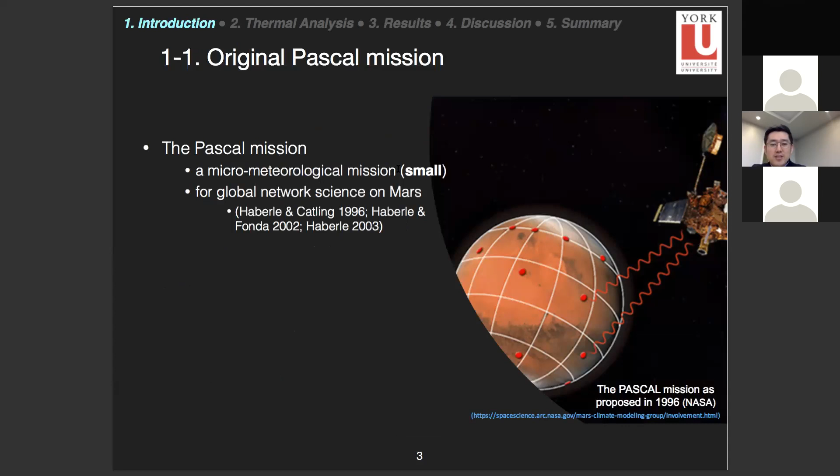So the original Pascal mission was actually proposed over 20 years ago. And they tried to send to Mars several micro-meteorological landers, which were actually small at the time. And the main objective of the mission was to validate Mars General Circulation Models, GCMs, by measuring global surface pressure.

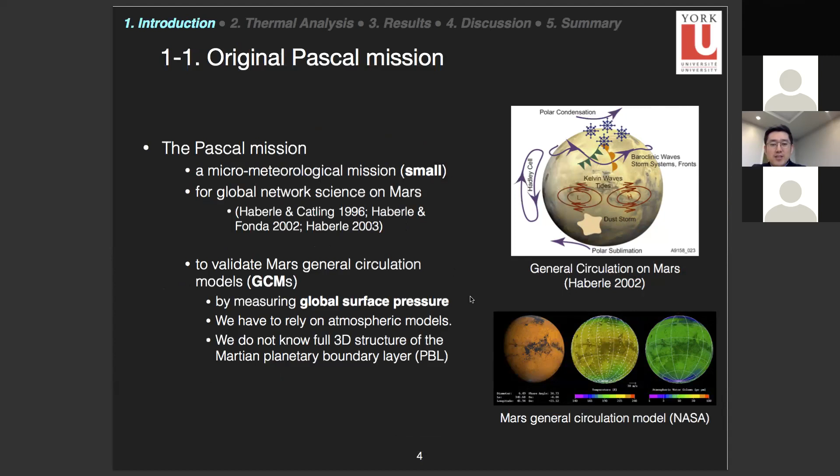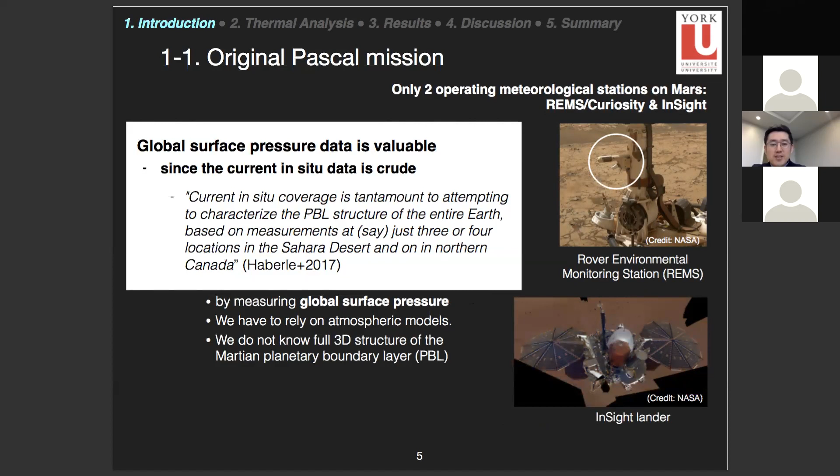The importance of the measurement of the global surface pressure is that our current knowledge from in situ data is very crude. It's like attempting to characterize the PBL, which is the planetary boundary layer structure of the entire Earth, based on measurements at just 3 or 4 locations in the Sahara Desert and in northern Canada. So currently there are only 2 operating meteorological stations on Mars. Those are REMS on Curiosity, and the recently landed InSight lander.

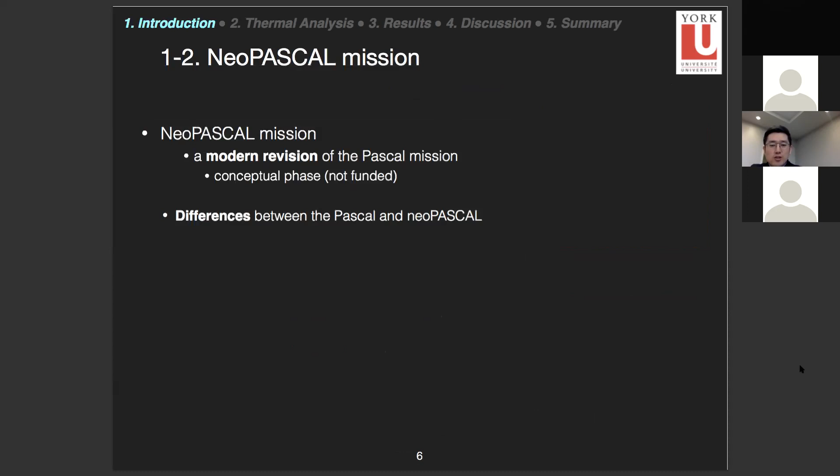So the Neo-Pascal mission is a modern revision of the Pascal mission. Currently, it is a conceptual design. We don't have funding yet, so hopefully we'll apply for funding in the future. The major difference between the 2 missions is size and mass. Thanks to recent progress in miniaturization of technologies, we can use CubeSat and commercial off-the-shelf (COTS) components, so that we can reduce the mass about 10 times from the previous mission.

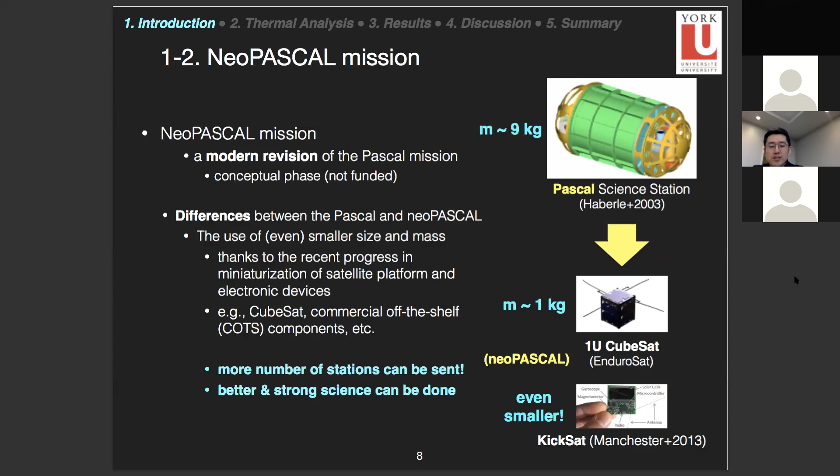By doing so, we'll be able to send a larger number of stations, and as a result, we will be able to do better and stronger science in the future. However, there are several challenges, like thermal, structural, electrical and EDL, which is entry, descent, and landing. In this study, I will focus on thermal design, and everything other than that will be covered in further studies. So, the purpose of this study is to assess the feasibility of the thermal design and thermal model of the Neo-Pascal mission through thermal analysis.

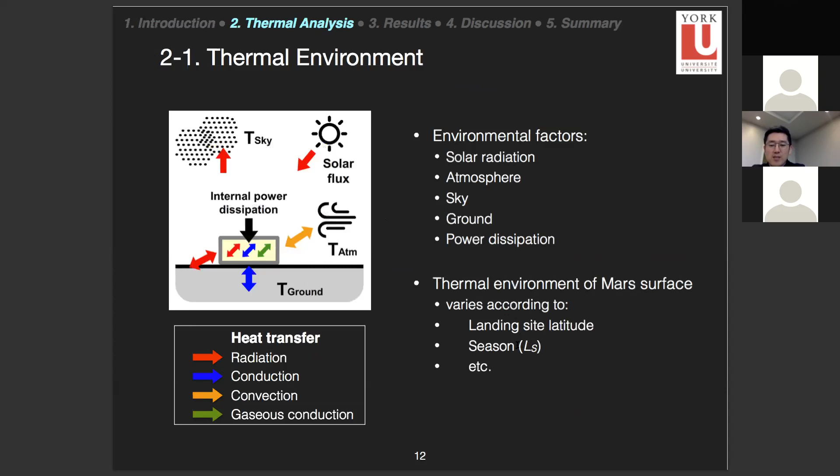The second section is about thermal analysis. First of all, I want to talk about the thermal environment of Mars. The landing station will exchange heat with environmental factors, for example, the sun and atmosphere, and cold sky and ground as well. And the values of the thermal environment, like temperatures and solar flux, vary mainly according to landing site latitude and seasons, which can be defined by Ls, which is solar longitude.

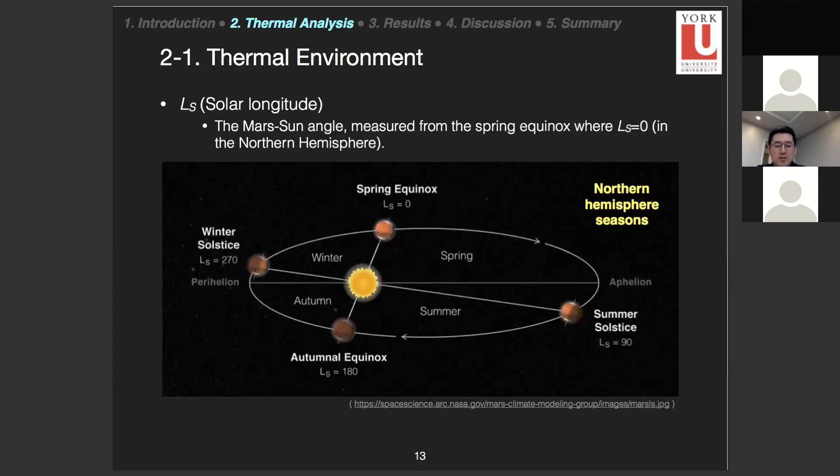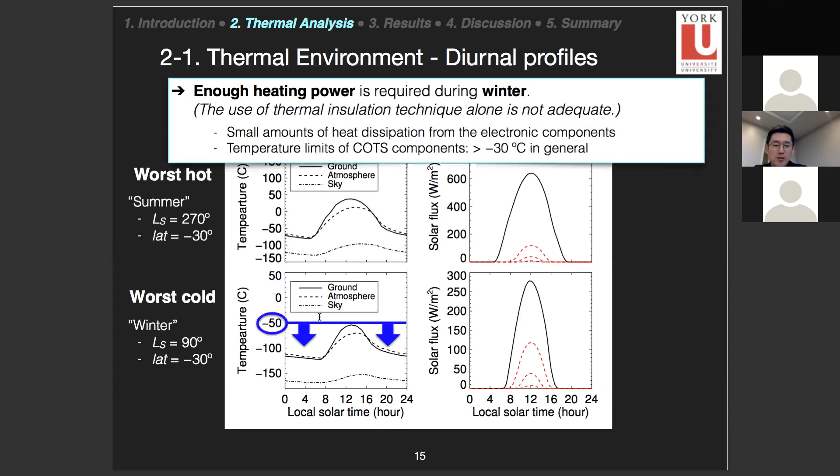And as you can see in the left panels, for the worst hot case in summer, the temperature of the environment sometimes goes above room temperature. However, in the winter, most of the temperature goes below minus 50 degrees Celsius. So this indicates that we need enough heating power for a successful mission. And in order to obtain enough heating power, we should get more solar flux.

That is natural. However, as you can see in the right bottom panel, those values indicate solar flux at the surface according to latitude. So when it is minus 30 degrees, the peak goes over 270 watts per square meter. However, when the latitude goes down to minus 50 or 60, it greatly decreases. So in this study, at first we wanted to assume the landing site latitude to be plus minus 30 degrees.

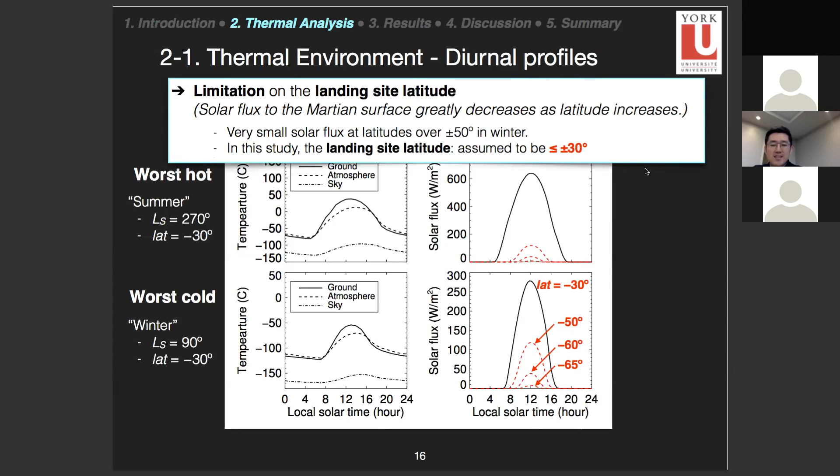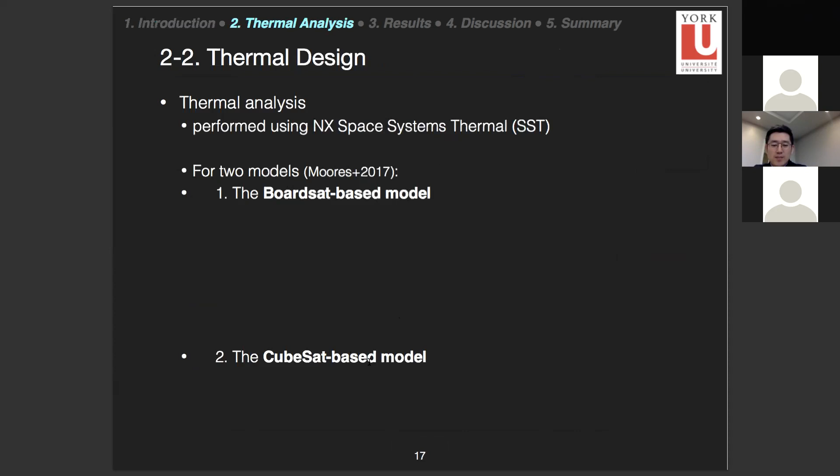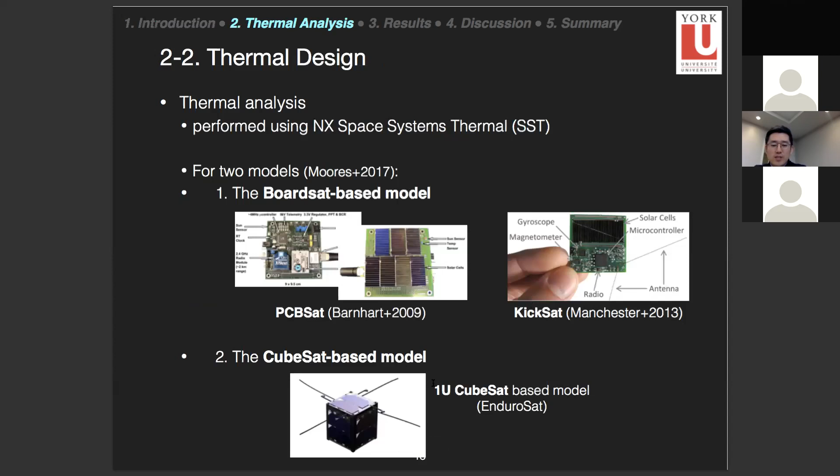And we performed thermal analysis for two models. The first one is a Boardsat-based model, and the second is a CubeSat-based model. And those platforms have been recently used by other researchers, and the CubeSat platform is widely used at the moment.

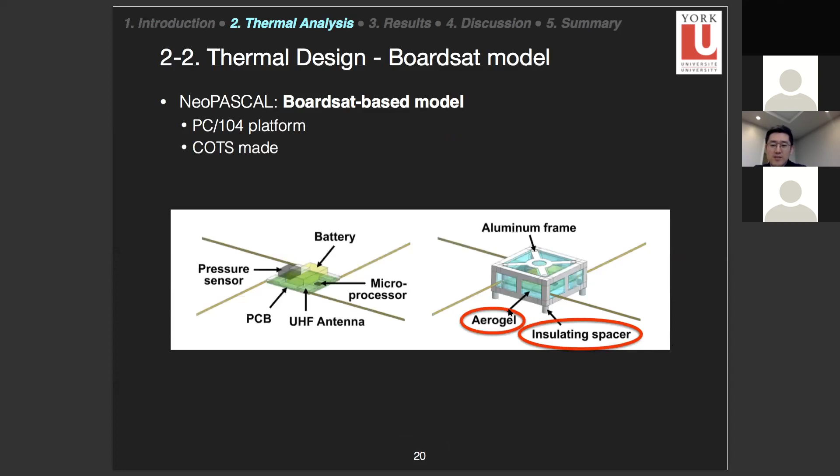And in the right panel, you can see some thermal structures, something like aerogel and insulating spacers. For aerogel, we want to use a flexible one in order to avoid any damage or crack, because the launching and landing environment will be very harsh. And the aerogel's thermal conductivity is very low.

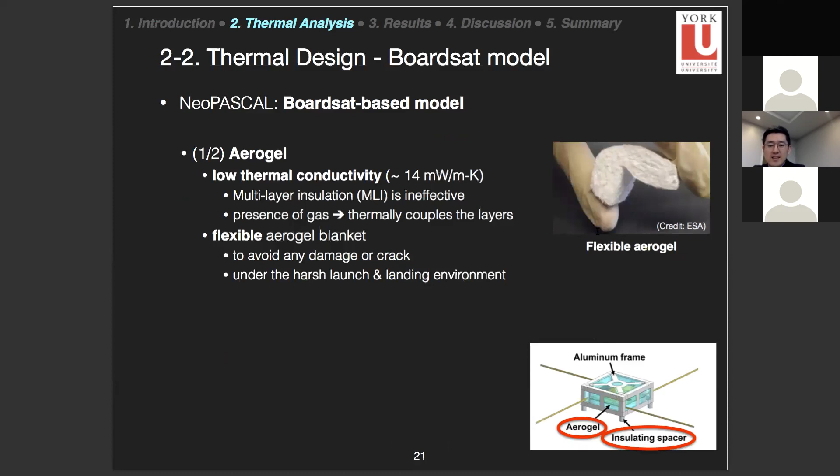We also use the insulating spacers. Actually, the spacer is made of aluminum, which has quite moderate and high thermal conductivity. But by inserting G10 washers, which have low thermal conductivity, we can greatly decrease the effective thermal conductivity. And those insulating spacers will be mounted to the corners and its structures.

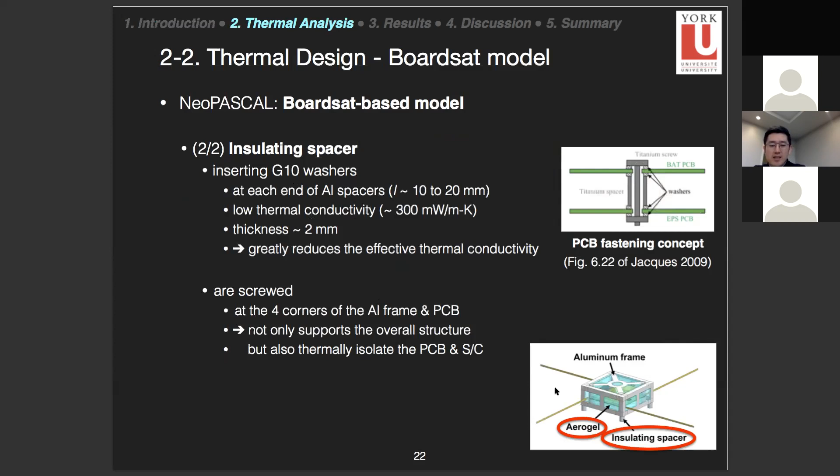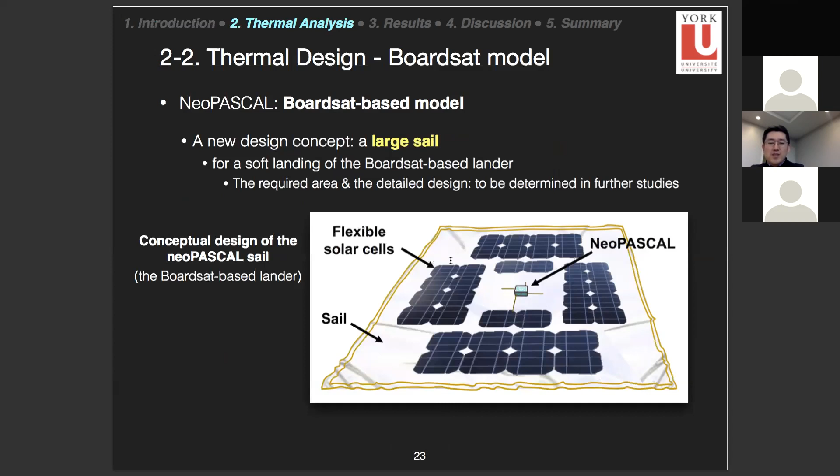And I want to show a new design concept, which is a large sail. Basically, this sail is for soft landing of the Boardsat-based lander. As you can see here is the Boardsat-based lander. And the great advantage of this kind of concept is that we can utilize a large area for the flexible solar cells. So we want to use commercial flexible solar cells to maximize the power generation.

And those kinds of concepts were already demonstrated by other researchers. Something like Tsuda and colleagues demonstrated a deep space solar sail, and they attached thin film solar cells on the sail and something like that. But we have a different purpose. Our sail is mainly for landing. But the detailed structure and design of the EDL is not covered in this study.

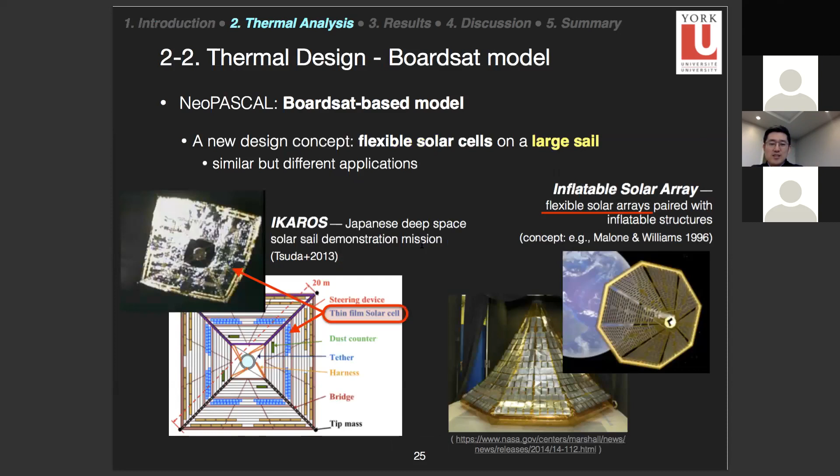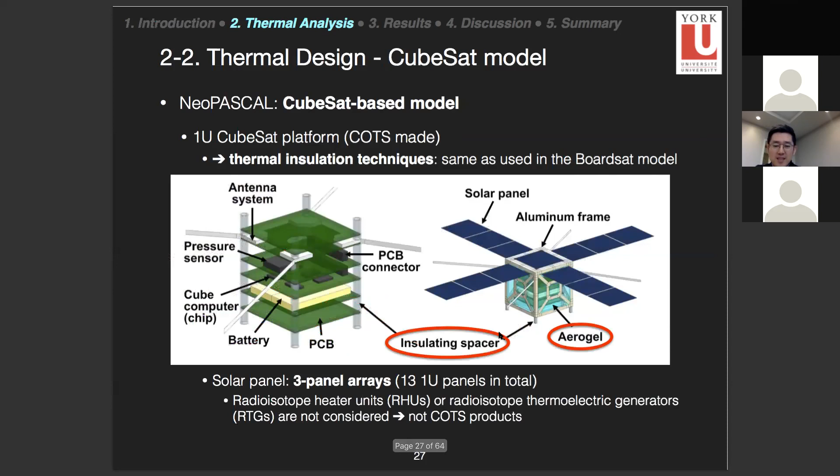So the second model shows the CubeSat-based model and the components here. And we also use aerogel and insulating spacers as well. And this table shows the power budget of the Boardsat-based model. And we calculated assuming 10% margin from the power consumption.

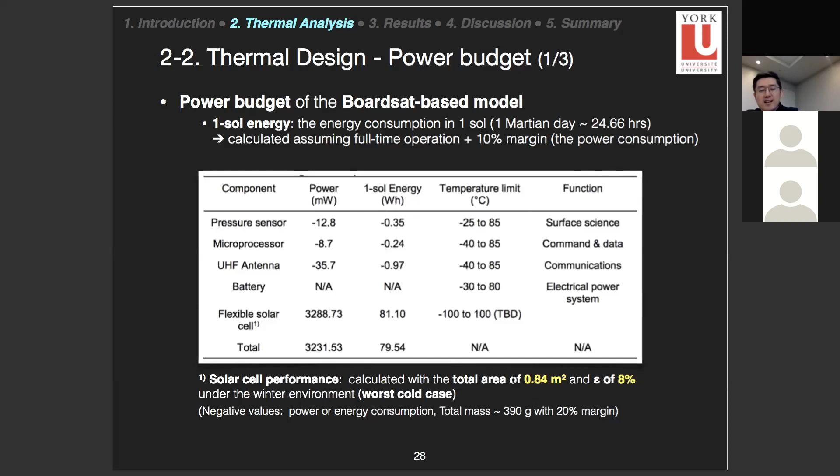And as you can see here, negative means the consumption. So power consumption of each component and one sol energy. One sol means one Martian solar day. One sol energy is calculated like this. And the solar cell performance values were calculated using a total area of 0.84 square meters of solar cells and an efficiency of 8%.

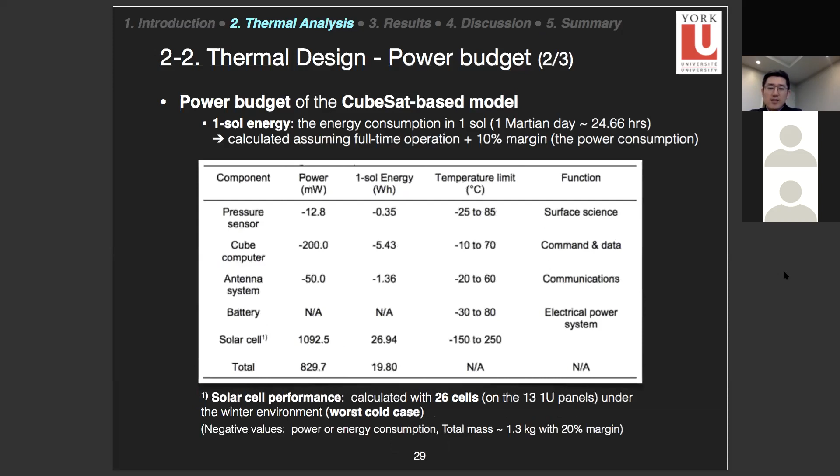So this value, 1724 watt hours per square meter, is calculated as the area under the solar flux of the solid line. And the dust deposition of 30% was calculated using a dust deposition rate of about 0.3% per sol.

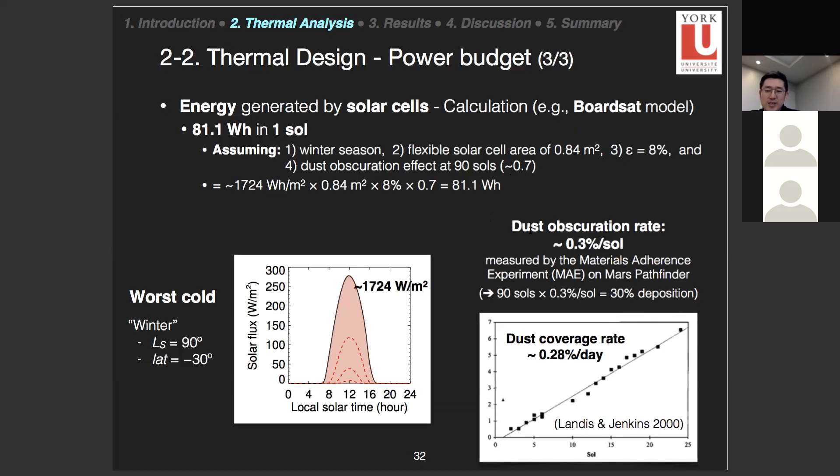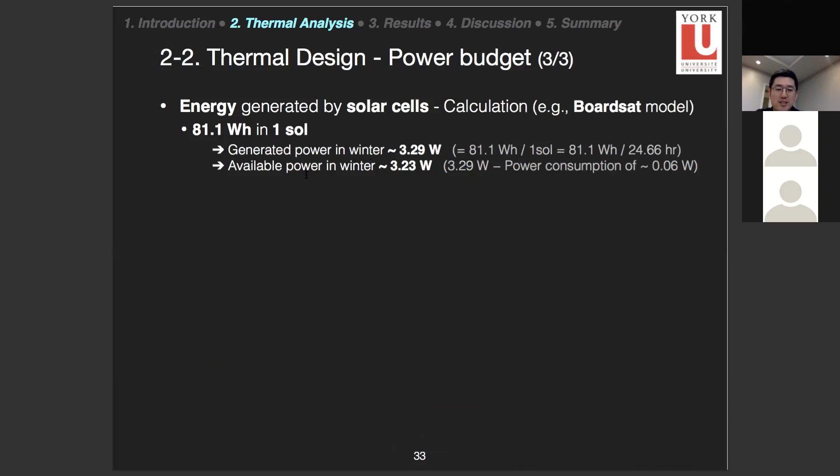And using the previous values, we also calculated the generated power in winter and available power in winter. Those values were also calculated by assuming 20% of margin from the heating power here, and 20%. And we also assume that there should always be a remaining battery power level of about 20% every morning, just in case and for emergency. So we use several margins just in case.

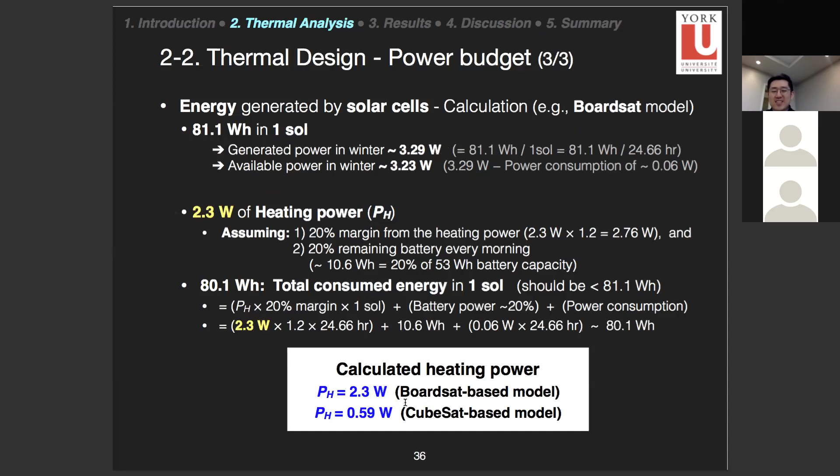So the finally calculated heating power of the Boardsat-based model is 2.3 watts, and that of the CubeSat-based model is about 0.6 watts. The reason why the heating power of the Boardsat-based model is larger than the CubeSat-based model is the use of the large area of the solar cell.

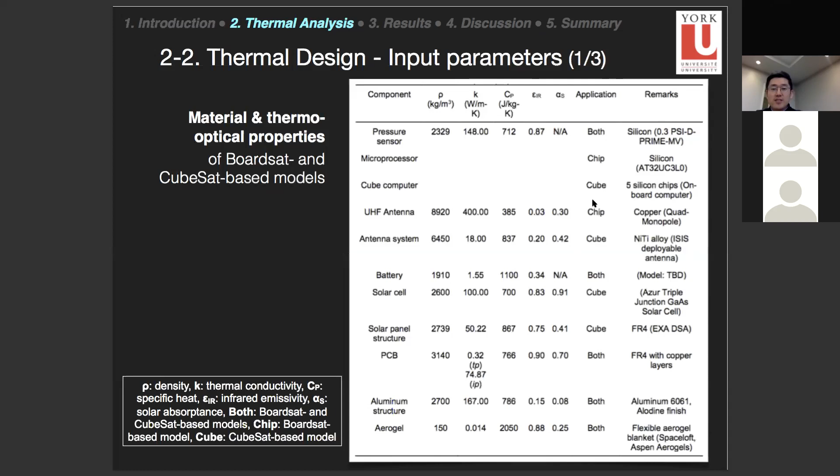And this table shows the input parameters, something like density and thermal conductivity and thermo-optical properties of each component according to their materials. And we also calculated thermal conductance values between two joint surfaces. And I want to skip this part.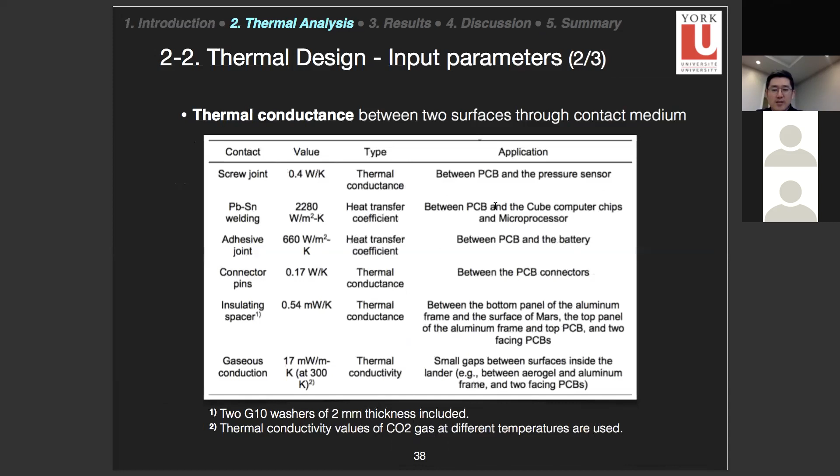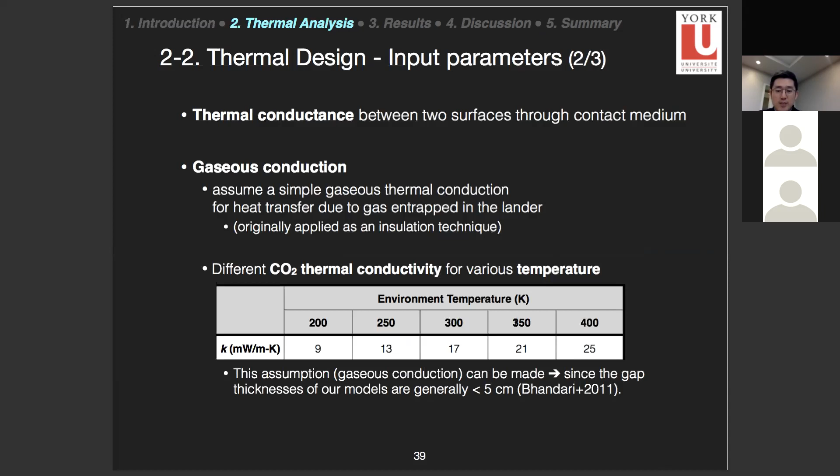And I also calculated gaseous conduction between PCBs and some components, because there are thin gaps between the layers and the PCBs. And so I used the CO2 thermal conductivity for various temperatures, as you can see in the table. I also used extreme convective heat transfer coefficients based on the literature, and also albedo here as well.

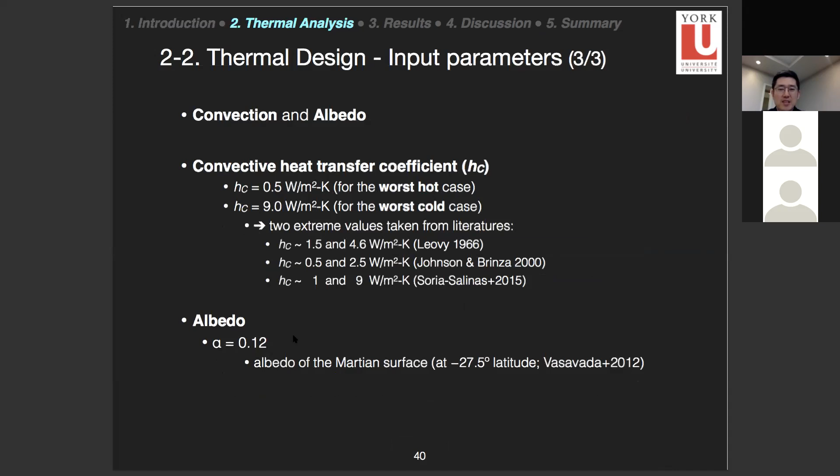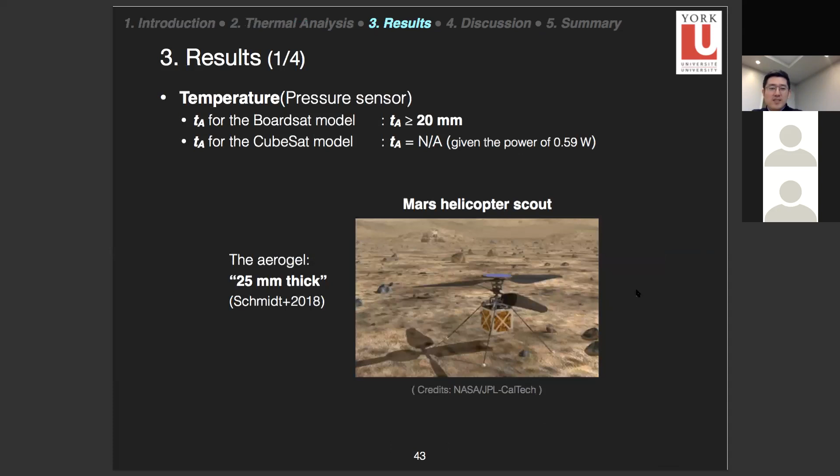This indicates that we absolutely need enough heating power in order to survive on the Martian surface. So our analyzed aerogel thickness is slightly thinner than the aerogel which will be used in the Mars Helicopter Scout, which will be deployed from the Mars 2020 rover. The second result shows the temperature of each component.

I used a single aerogel thickness. As you can see in the right panel, the CubeSat-based model with 15 millimeter thickness of aerogel does not satisfy the requirement, especially in winter.

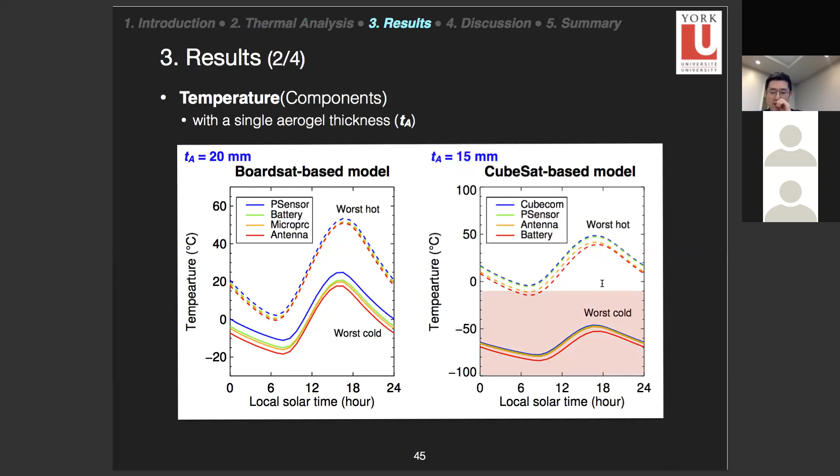However, with the Boardsat-based model, every component satisfies the temperature requirement, and each temperature is about 15 degrees Celsius above the requirement. So I think our thermal model is quite robust.

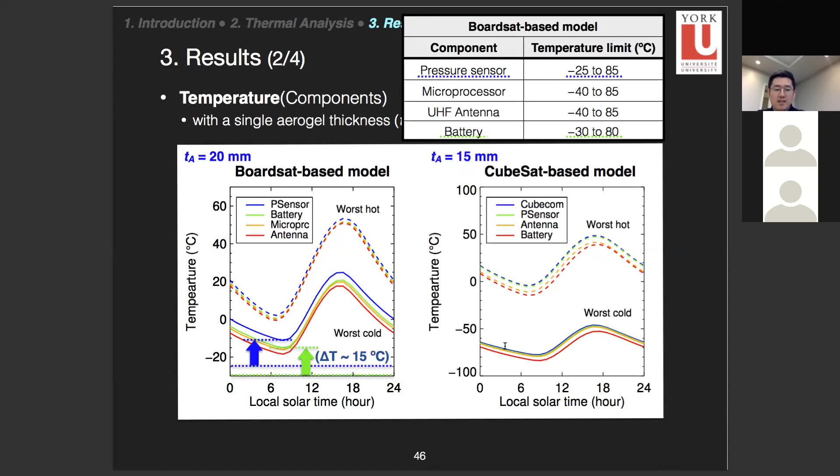These figures show the temperature distribution at the coldest moment, which is nighttime in winter, the worst case. The outer structure of both models has very low temperature. However, in the left bottom panel...

the inner component's temperature of the Boardsat-based model has quite a good temperature range within the temperature limit, even though the result of the CubeSat-based model does not satisfy the requirement.

However, we can see the effect of the use of insulating spacers here, because the temperature of each PCB is discreted.

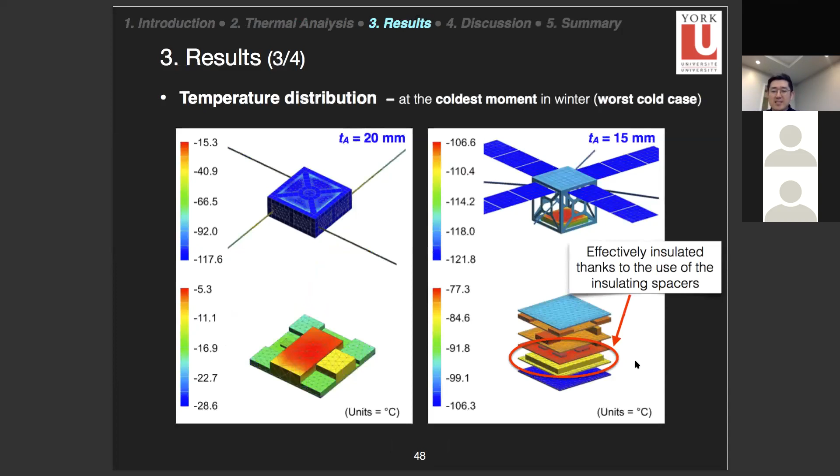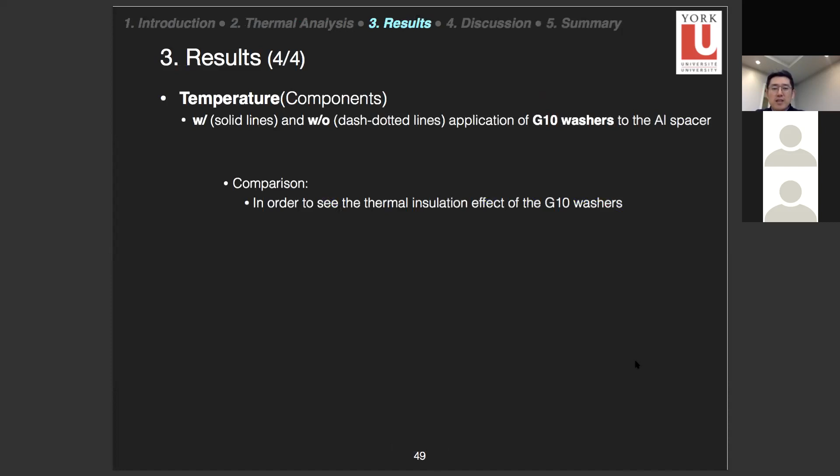Okay, so discussion. What specific science with the NeoPascal mission can we have? It depends on the landing site latitude, basically. In our study, we limited the landing site latitude between plus minus 30 degrees.

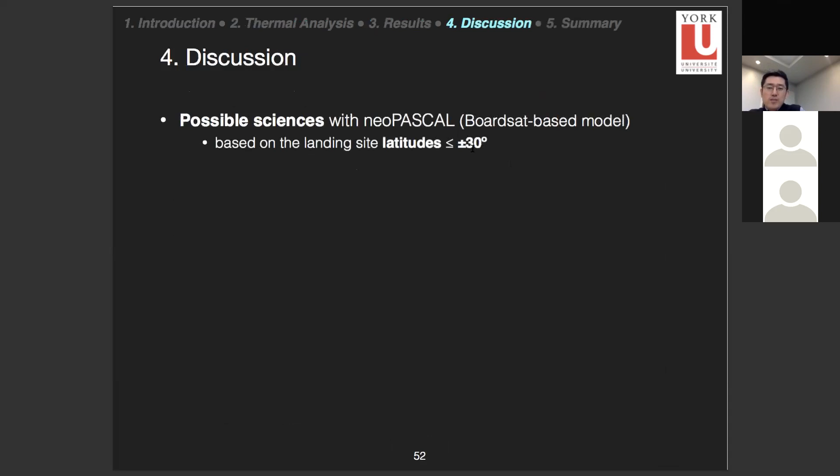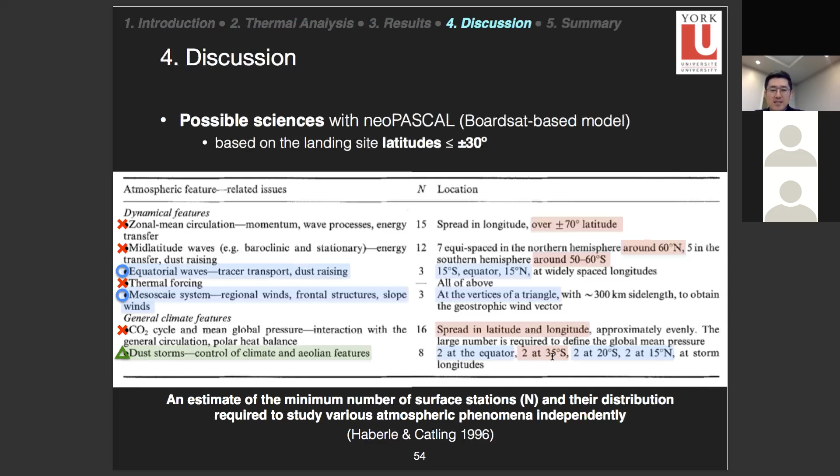I want to talk about the feasibility of our thermal model. The thermal model of our study is quite feasible, and based on the thermal analysis results, it will survive in any season for at least 90 sols, only if it is landed between plus minus 30 degree latitudes.

The reason I said our thermal model is quite robust is that we assumed several margins, and some of those margins are quite tight. For example, we used a solar cell efficiency of about 8% for the Boardsat-based model. However, there are several brand new flexible commercial solar cells which have over 14% efficiency.

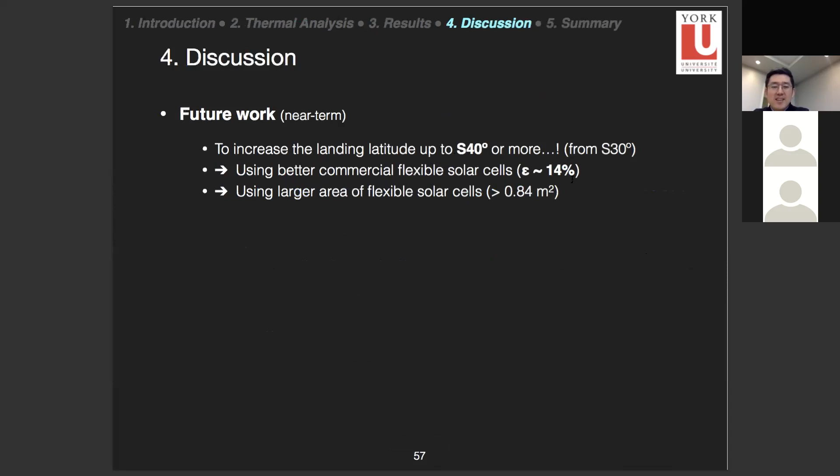So for future work, I want to increase the landing latitude up to 40 degrees or even more, like 50, by using better commercial flexible solar cells with higher efficiency, and by using a larger area of flexible solar cells.

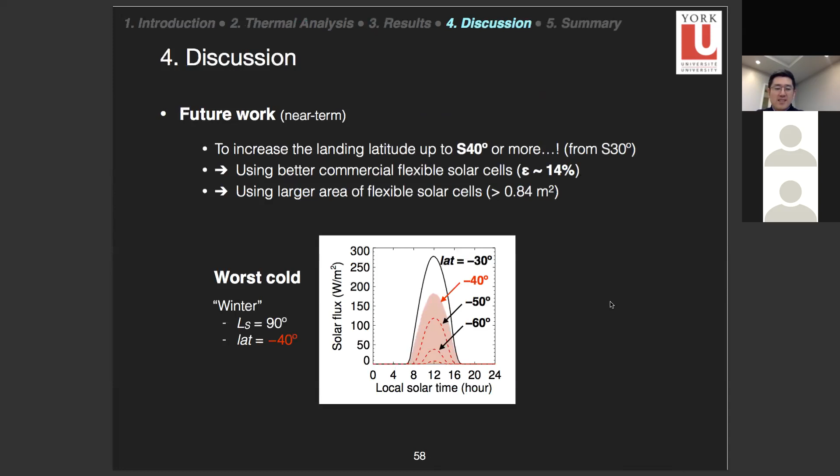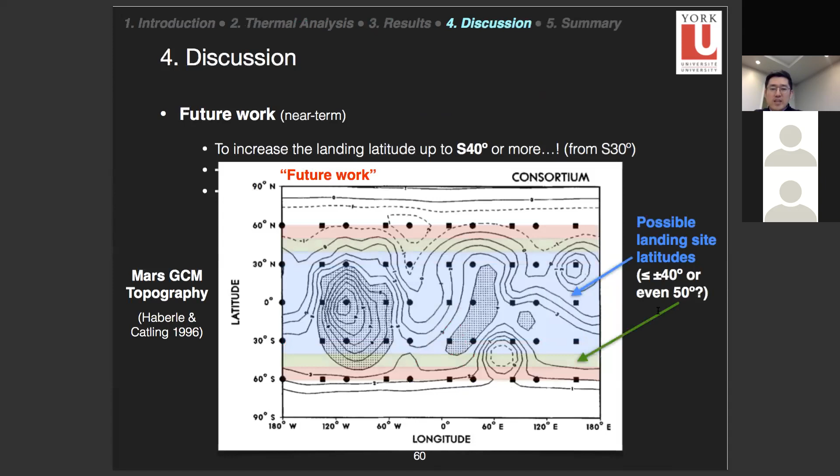So by doing so, the sciences that we can do with the NeoPascal mission will be more, including the dust storms and maybe mid-latitude waves as well.

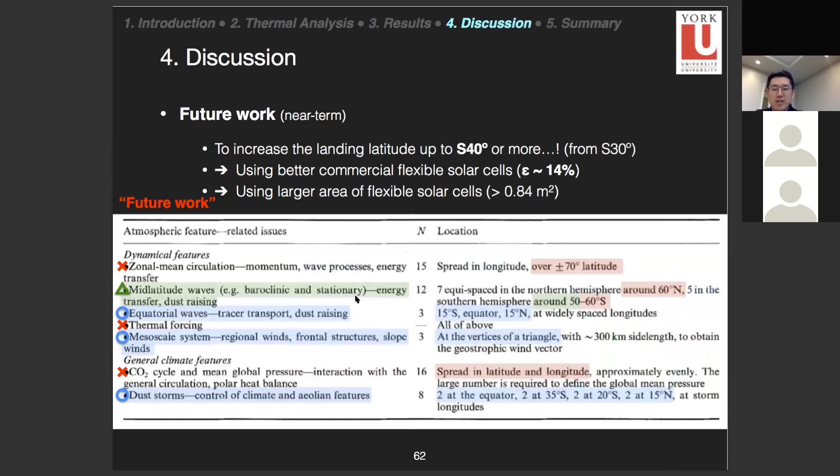And for Mars meteorology, the NeoPascal lander will be able to study these topics. Okay, thank you.

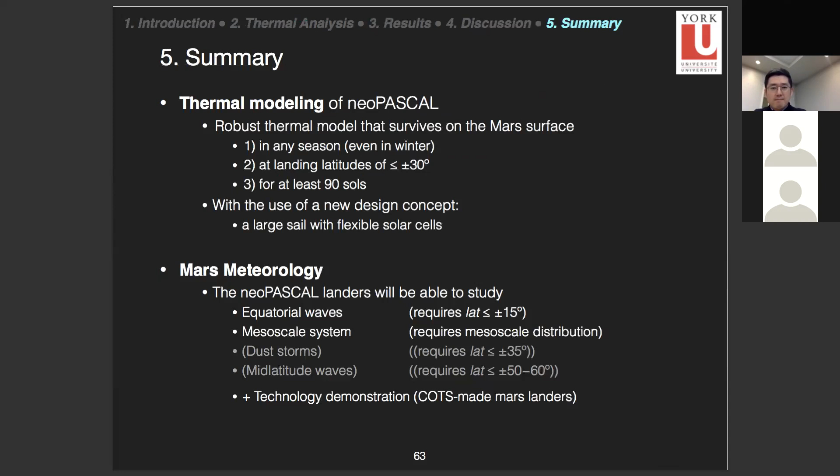Are you in the same room actually? No, I'm not in the room with them. Okay. All right.

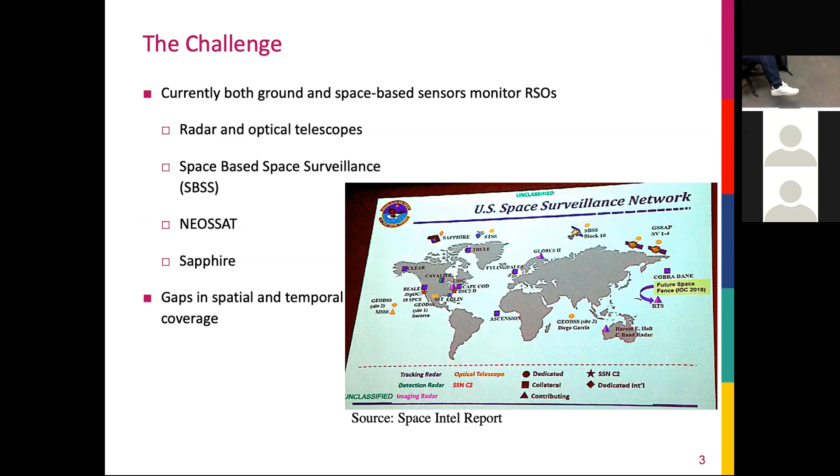You can see in the image there, SBSS, space-based space surveillance, and the GSSAP satellites, which I believe are for observing the geostationary belt. Canada also has two of its own satellites which monitor RSOs: Sapphire, which contributes to the Space Surveillance Network, and NEOSSAT, which I don't think contributes to the network database, but it still searches for RSOs. But despite all of these efforts, there's still gaps in both the spatial and temporal coverage that we have of RSOs.

One idea is to use star trackers to monitor RSOs. Star trackers are used for attitude determination. Essentially, you take an image of the stars and you can tell which way your satellite is pointed, and these are used on a lot of satellites right now. So the thought is that they may provide an additional source for RSO detection.

It's not intended to replace anything. It's not going to replace radar or optical telescopes on the ground, but it's meant to complement them and provide an additional source of RSO detection and updates.

That's what Magellan Aerospace is doing, co-funded by the CSA's STDP program. They're designing analytic and machine learning algorithms that will detect RSOs within star tracker images. And that is where I come in.

My objective was to perform a feasibility study of commercial off-the-shelf star trackers and their ability to detect and identify RSOs.

Some of my goals were to determine the number of RSOs that would actually be detectable by a star tracker in orbit around Earth, how many objects you're actually going to see. I also modeled some of the effects that different star tracker and mission parameters have on detection rates, mainly the orientation of the star tracker - how does the direction you're pointed affect the number of objects that you see?

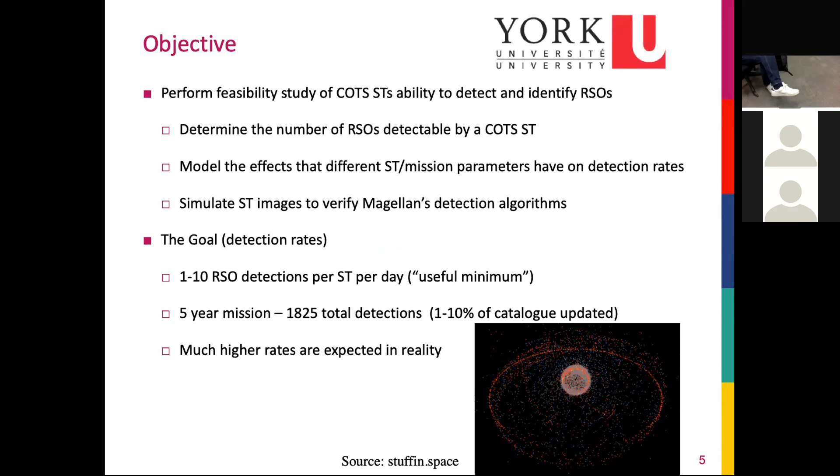The way I did these things was through a couple different simulators. One was an analytic simulator, and it estimated detection rates - given this star tracker and these characteristics, in this orbit looking in this direction, how many objects are you actually going to see? How many resident space objects?

The simulator uses the TLEs, the two-line element sets, of RSOs and the host star tracker satellite. These two-line element sets contain all of the information needed to recreate the orbit of a satellite. Using this information, it propagates the orbits of the RSOs over a specified amount of time, and determines how many objects the star tracker will actually see.

It spits out 4 parameters at the end: 2 accesses and 2 detections. An access is any time an RSO crosses the field of view of the star tracker, and a detection is when the RSO is close enough, big enough, and bright enough to actually be detected. The terms unique and total refer to: unique is the number of unique individual objects you detect, and total takes into account repeat detections of the same object.

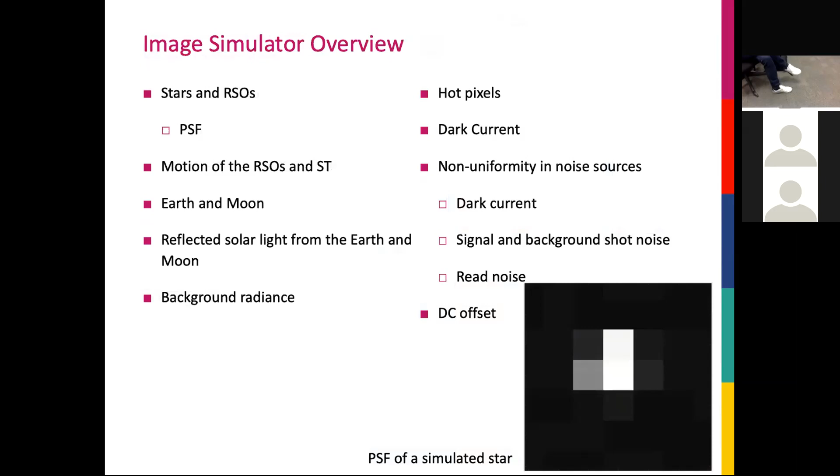It simulates the Earth and the Moon, as well as reflected solar light from the Earth and the Moon, which causes background noise and makes it difficult to detect RSOs. Background radiance, and then a bunch of noise sources as well, so hot pixels and dark current, non-uniformity in these noise sources, as well as a DC offset, just intended to make the images as close to level 0 as I could.

These are 2 simulated images just showing the different exposure times. So there's a lot of information in the headers up there. But on the second line, on the image on the left, the exposure time is 0.1 seconds. And on the image on the right, the exposure time is 10 seconds. And this is just showing when you have a longer exposure time, the stars begin to streak and you have more noise.

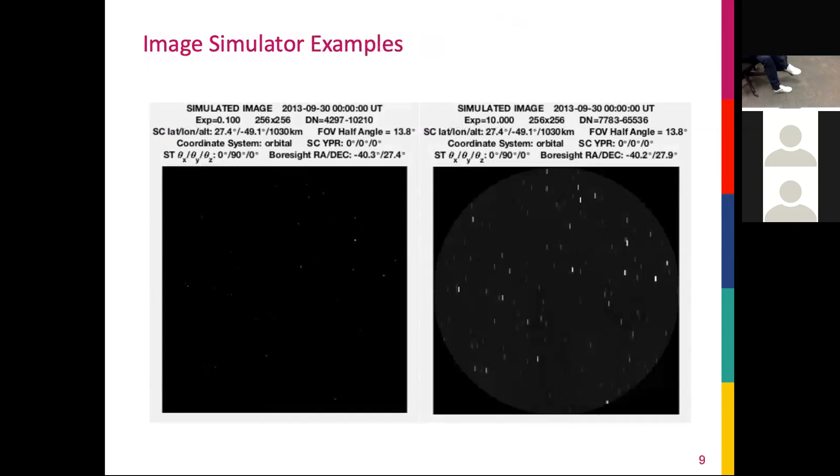So here, zooming in on them, you can just see all the stars are streaking in one direction, and then RSOs are typically going in other directions. So those are two RSOs there.

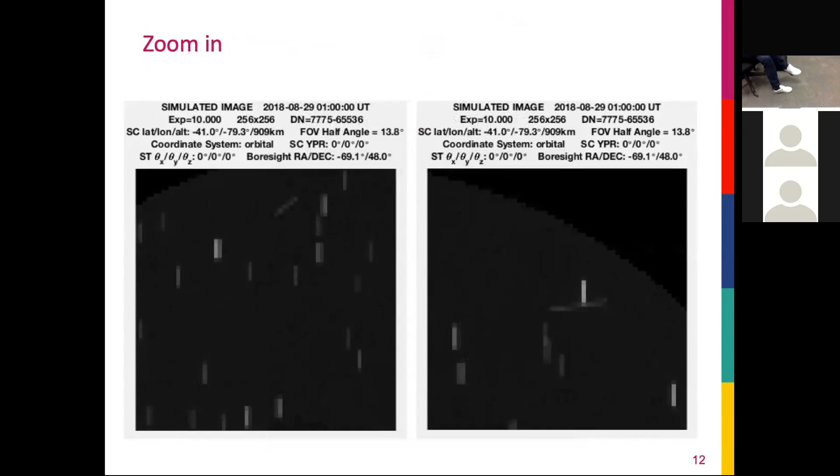Comparing with the FAI, I was able to compare the position of the RSO as well as the brightness to verify and quantify that the image simulator is actually working properly and doing what it's supposed to do. I also compared with this final image here. Same thing, this is a rocket body: FAI image on the left, the simulated image on the right, at the same time, same parameters.

One thing to note, all the RSOs are simulated as spheres. The rocket body was simulated as a 16-meter diameter sphere, just to simplify some of the calculations the simulator needs to go through. So this rocket body was simulated as a 16-meter sphere, and it shows up in about the place that it should.

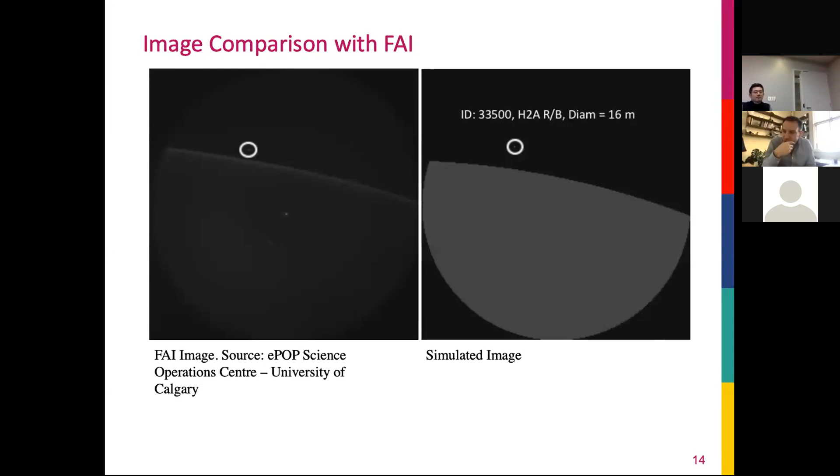If not, actually, I have one. Sure. On one of the first slides, you showed these collisions, like the Chinese test, and another collision between two satellites. Yep. For how long do the particles that are coming out of this stay in a very similar orbit?

That would depend. There are people looking into how long debris actually stays up there, and when there is a collision, what actually happens. Does it stay in the same orbit and stuff like that? I can't speak too much on what actually happens once it's created. There are whole studies on what happens when there is a collision, so I can't speak too much on that. Okay.

But you would expect, because the orbital velocities are really high, that even if you change by tens or hundreds of meters per second, you're still kind of in the same orbit after the collision. Yeah. And it would also depend on how they collide. If they're in similar orbits to begin with and then collide, they might stay in a similar orbit, but if they're going cross track with each other, which would be a lot less likely, I would expect fragmentation debris to go every which way.

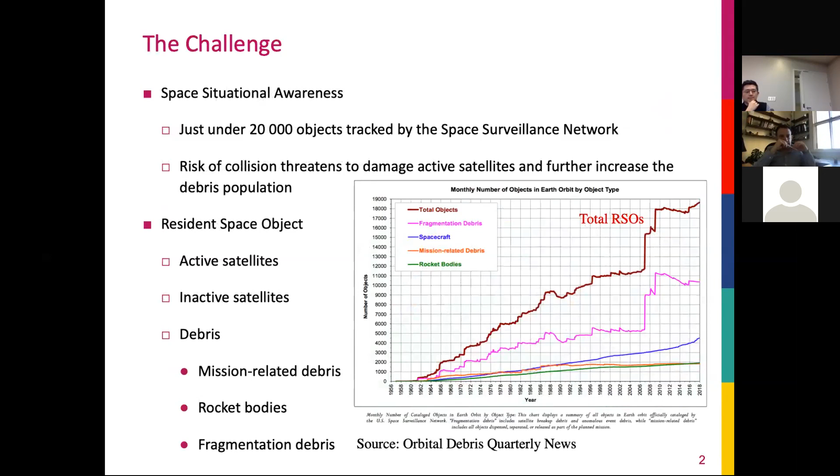So we suspected that was an RSO in that last image. If I can get there quickly, we suspected that it was an RSO, but we weren't 100% sure. And then I simulated the image, and it showed up in the same place. And then because I took in all the TLEs to simulate it, I could figure out which TLE I used to simulate that one there, and I was able to identify it that way.

So with the FAI images, we couldn't even be 100% sure if that is an RSO in there, or whatever it was. We couldn't be sure exactly what it was. With the simulator, you're putting in the RSOs, so okay, I know this is an RSO here, so when the algorithms are tested on this image, you know for sure what the results should be. With the FAI images, we didn't know for sure if that was an RSO.

Yeah, I guess that's exactly what I'm saying, right? Because now you know that this is an RSO, so the pipeline applied on the real data better find that RSO. Right. So you could, with what you're saying, use the real FAI image and then put a simulated RSO just in that real data.

I guess I'm saying two things. The first thing is you inject another signal there and it should find it. The second point is exactly what you also said: because you can simulate the images, you know which RSOs should be in the image on the left, right? And the pipeline should find those. Right, yes.

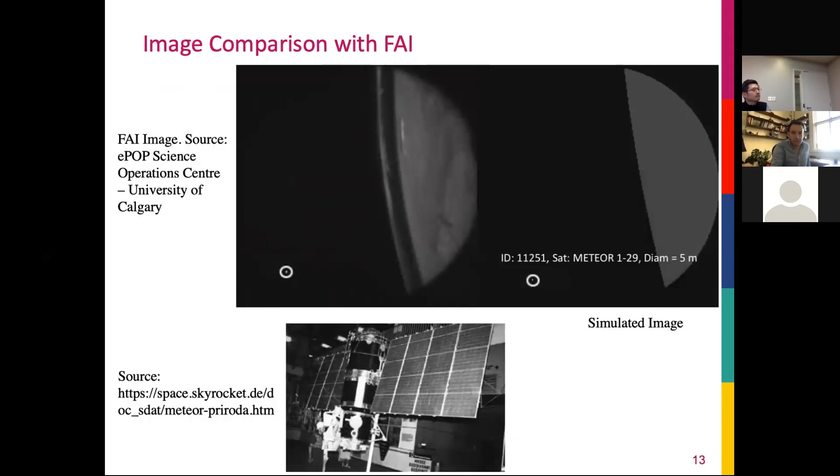So those statistics you pulled out in the 6 different simulations, are these from simulating all 20,000 objects in the catalog? Yes. Or I think it was probably about 13,000 low Earth orbit objects. So not the full catalog, but all the low Earth objects in the catalog, which was about 13,000, I think. 13,000. Okay, so you really used actual RSO data to pull out these detection limits.

Yes. Okay. Cool. We asked because we're doing at Laval a very similar project, whose intent is to use a dedicated sensor to probe into.

I actually have to leave right now, because I have a meeting at 1. But feel free to keep on discussing. It's just that I have to leave to go to another conference. Sure. Okay.

So I was saying that we're doing a very similar project, but the intent is to have a dedicated sensor that senses very small objects that are not part of the catalog, so we'd be very interested to discuss in more detail some of the tools you've used. I guess this was a master's or a PhD project? Master's. Okay, very interesting. So we'd be very interested in knowing a bit more. We'll probably chat through emails after the meeting. Yeah, absolutely. That would be great.